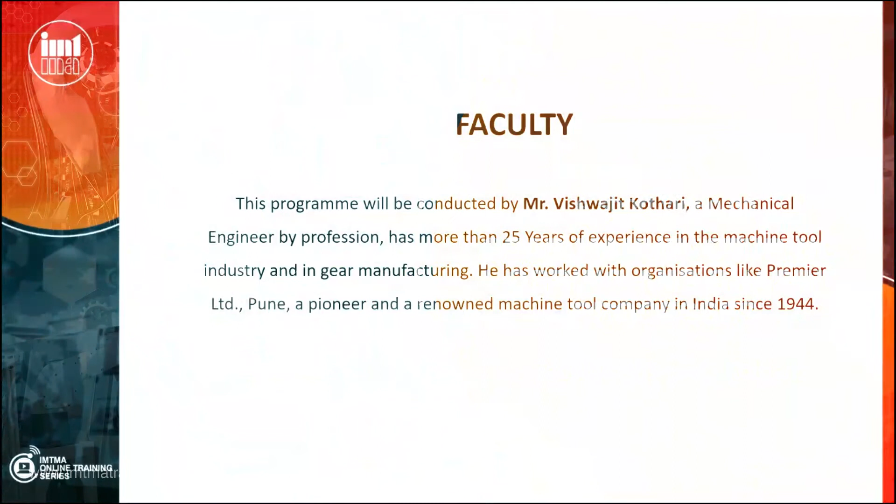Myself, Mr. Kothari, I have been working in the machine tool industry for the last 30 years, and it's Premier Limited. So the expertise was in gear cutting, gear machines like gear hobbing, gear shaping, gear tooth chamfering, rounding machines, and also our other products were like vertical turret lathes and machining centers.

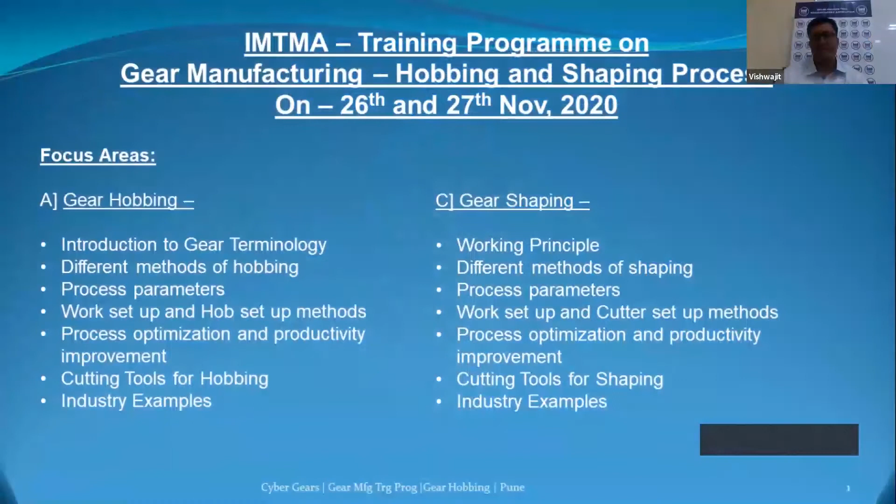Gear hobbing process, the most versatile manufacturing process. Now, in gear hobbing, say we have here a raw material, it could be a gear blank, then we can machine the gear with the hobbing process or shaping process primarily. Then these two gears after machining can be shaved for the finishing operation. Shaving is a finishing operation. Hobbing and shaping are primarily roughing operations.

Though of late, there are some machines and technologies which can eliminate shaving, and gears can be offered directly to heat treatment, that's hardening. But let us discuss the process like raw material, hobbing, shaping, shaving, then heat treatment, that is hardening. After hardening, we have honing, and then finish hardened gears. Now, honing is also a newer technology than grinding technology, but either the gear is ground or honed after heat treatment.

Now, if shaving is done, then honing is better if after heat treatment more accuracy is required. But at times, after hardening, it is also stopped. The accuracies of the shaved gears after hardening are studied and put into practice for shaping and hobbing operations in terms of process parameters, so that the shaved gears after hardening are directly used in the assembly.

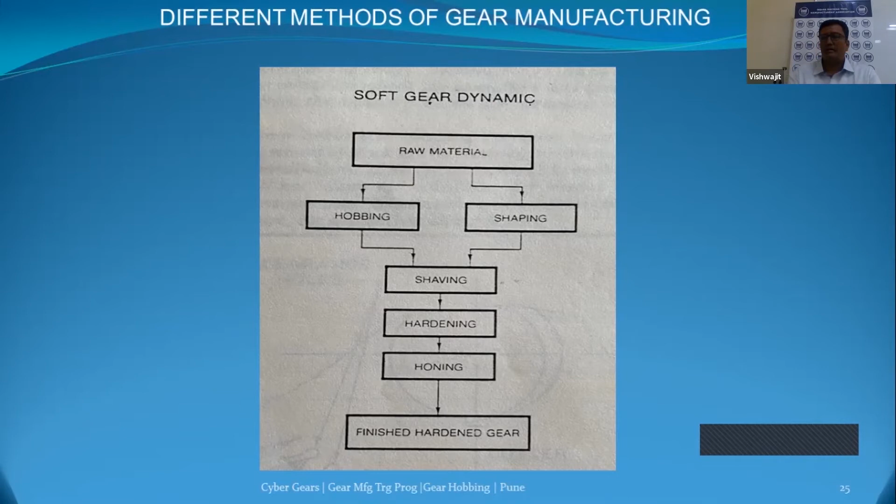It has to be necessarily a much harder hob than the hardened gear. So naturally, it comes to the carbide hob. So the carbide hob does the skiving hobbing. Since the cutting forces are very large, one point to remember about the skiving hob is that it has a negative rake angle, because it has to withstand the large cutting forces. Secondly, since skiving hobbing is hardened gear hobbing, the teeth are already formed. The teeth are hardened.

Now we have to do the skiving hobbing. So the teeth have to mesh with the hob teeth properly before the start of every cutting cycle. Hence, there is a sensor or a device which positions the workpiece in front of the hob tooth. The tooth space of the hardened gear is positioned in front of the tooth of the cutter, and they mesh first. The reading of the workpiece and the reading of the cutter start from that specific point and stop at the specific point only, so that meshing happens properly, because the allowance on the hardened gear is very small.

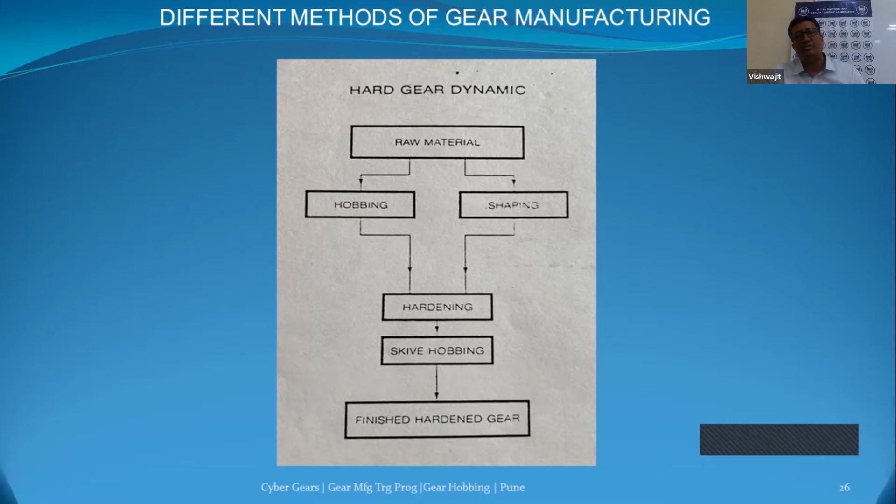For carbide hobbing, the allowance is not much. It's in the range of 0.06 to 0.15 at the most per flank, because the more the allowance, the costlier the process and the hob. Wear and tear of the carbide hob is very costly. Sharpening is also very costly. So the allowance is kept less. When the allowance is kept less, the machine has to be very accurate, with oriented position engagement. These two things differ from the common hobbing operation: one is the tool, the second is the positioning or orienting of the hardened gear for the cutter.

Now the blanking. See, for any gear cutting, first we need a gear blank. So that gear blank is nothing but a turned blank, or the blank finished or ready for the hobbing operation, just having the necessary allowance on it. So the blanking refers to the initial metal cutting operation in the process planning. That could be like a turning operation sequence, which produces the contour of a part starting from the raw material.

It's a simple thing. I mean, we need to have a shape of the gear to be cut on the machine. At least the workpiece configuration or the component configuration has to be near to the part to be cut, that is the gear, on the machine. So it removes the excess material to machine the part in its specification.

So of course, in industries, you all should be knowing we have stage drawings, like operation 10 for turning, operation 20 for drilling, operation 30 for some machining center operation, then operation 40 for gear hobbing, then operation 50 for gear tooth chamfering. So all these stage drawings play a very important role. So that stage drawing, when it comes to the hobbing operation, is nothing but the blanking operation. That's the gear blank.

Then we leave adequate stock for finishing operations. Then to prepare very good quality surfaces for location clamping of the part throughout the process. This is very important in blanking. See, my experience tells me most of the inaccuracies are caused because of the inadequate attention paid to the blanking operation. We do not have the geometrical accuracies as desired and required for the hobbing or shaping operations. And that leads to the errors in hobbing and shaping, which we may then attribute wrongly to machine errors

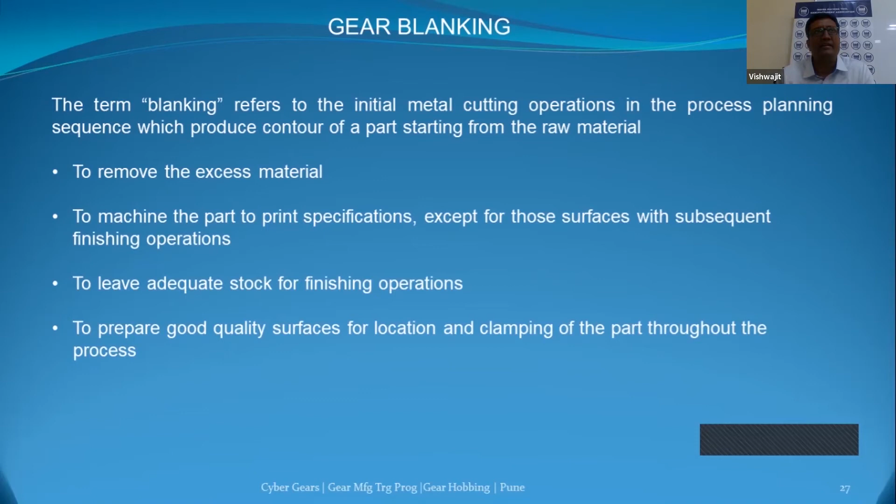So I would say, in short, my experience tells me the gear blanking accuracy has to be one grade higher than the grade required for the gear hobbing operations. Very important statement from my side. If you require a DIN 8 class gear, please see that you produce a blank in IT7 grade.

So we go to the hobbing process. Let us understand the fundamental process. So we have seen the gear terminology. We have seen the blanking process. Now we will see the hobbing process. A little bit of basics, so that we all know; we all do hobbing every day, but at times we don't know what the basics are. So by virtue of this training session, let us go through the basics quickly.

Most fundamental process in manufacturing, with very high productivity and versatility in manufacturing of spur and helical gears. It's mainly meant for cylindrical gears, and it is a continuous generating process. So once you start cutting the gear till it ends the face width, the whole gear is cut out. It's not intermittent. It's continuous generating.

Then during hobbing, both the cutter, that is the hob, and the workpiece rotate in a continual timed relationship. This is a very important statement. What does it mean actually? So the hob and workpiece should be in a continual timed relationship. Continual means at no time should it get disturbed.

Once it gets disturbed, either the hob will break or the gear blank will break. Normally the hob breaks. So this relationship never has to be disturbed. What is time relationship? Time relationship means for every rotation of the hob, there is a certain indexing rotation of the workpiece. That timing, that particular movement, has to be maintained. It's like the hob and workpiece are married. They are coupled. So that is the time relationship.

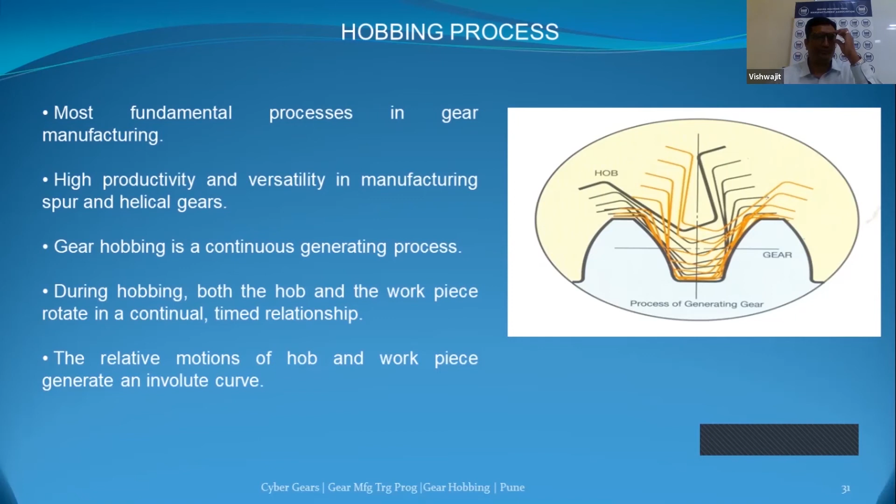Now during this rotation, the hob is typically fed axially, with all the teeth being gradually formed as the tool traverses the face width. This is the face width of the gear. This is the hob. It is rotating in this direction, and the workpiece is rotating in this direction. Suppose the hob is fed at the beginning of the workpiece. We see the teeth being formed. But when we have to cut across the face width of the gear, we have to traverse this hob. We have to move it in the axial direction, downward in this picture, or upward also.

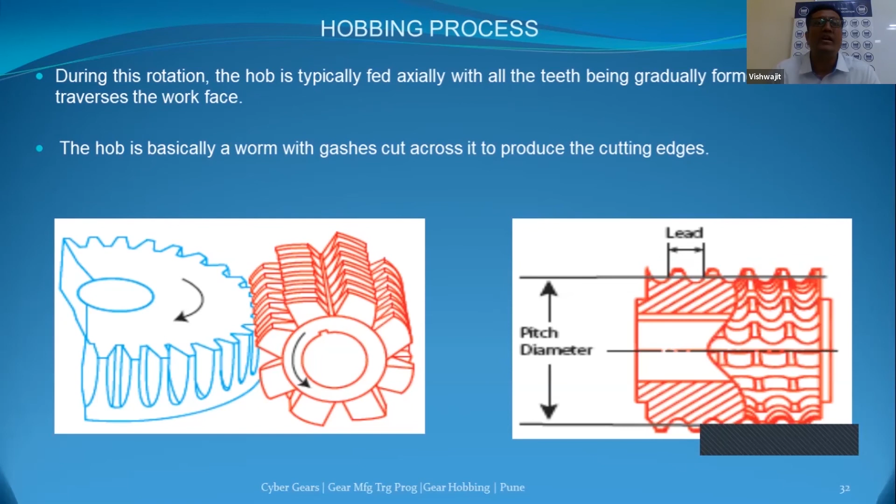Now you can think how many teeth of the hob will be responsible for cutting one flank of the gear teeth. Should be less than 10, isn't it? So this gives an idea: the more the number of teeth on the hob, the better to have good surface finish of the flank. Followed what I just explained? I'll repeat it one more time for all of you.

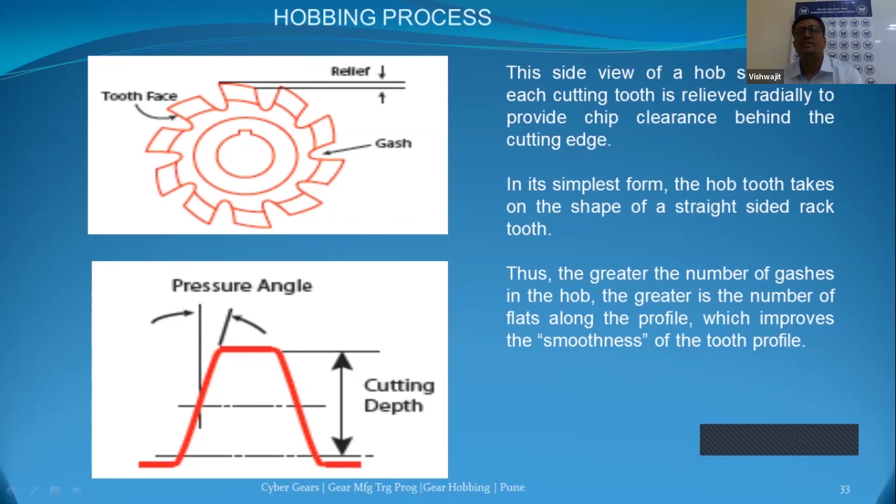Thus, the greater the number of gashes, which means the greater number of teeth in the hob, the greater is the number of flats along the profile of the workpiece, which improves the smoothness of the tooth profile. That's what I was explaining to you.